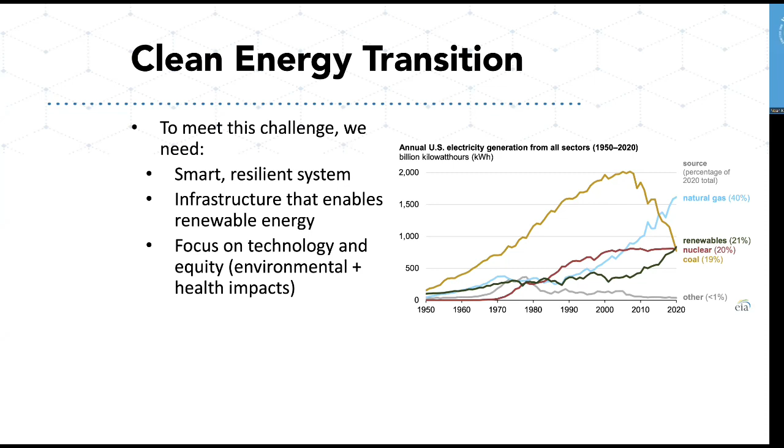So the three main things I want to talk to you about are: one, climate change is happening now, and so there's an urgent opportunity to address some of the most negative impacts of climate change by changing our energy utilization and switching out new sources of electricity generation and in transportation. We also know that energy is a major contributor to climate change, so therefore taking advantage of these technological innovations is going to be really important for our future. And I'm going to tell you about what we can do to reduce emissions and ways that we may be able to manage this transition in a better way.

So I wanted to start out just with a picture of the greenhouse gas emissions in 2018.

And this is a large and could potentially be a complicated diagram, but I really like it because what it shows is it links different sectors of our economy to carbon dioxide emissions, CO2, methane emissions, which is represented by CH4, nitrous oxide and fluorinated gases that all are greenhouse gas pollutants and contribute to temperature increases.

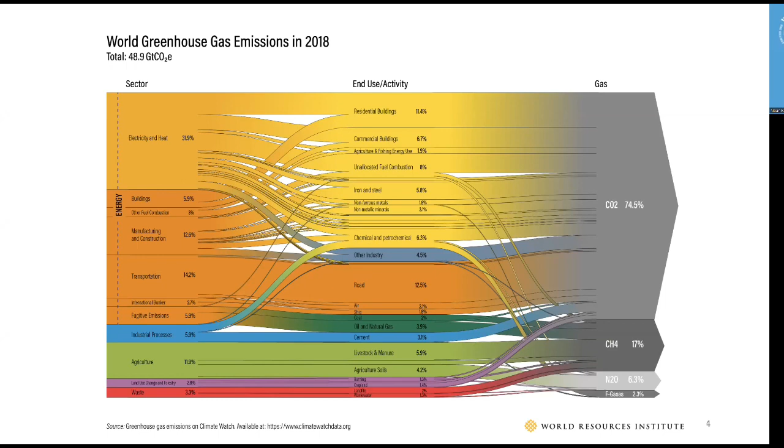And now there's a lot more focus, you may have heard in the news, about decarbonizing the transportation sector. And by decarbonizing, I mean going from a system that is mostly dominated by high carbon fossil fuel energy sources to one that has nearly zero carbon emissions. And that could be done by using electricity potentially in other sectors for transportation. But that's also a challenge that we have in terms of how do we reduce the CO2 emissions for large sectors like buildings, industrial processes, and agriculture.

I also want to give you a bit of a background in terms of the contribution of primary energy sources to the energy system in the US. So this is a snapshot of the US energy consumption in 2021. And it may look like a complicated series of flows and diagrams, but what I want to alert your attention to are a few things. So on the left side, we have the different primary energy sources, or essentially the key resources that provide energy that we can use in our economy.

Some of those sources are converted to electricity generation. So that's what we're using in our houses when we plug in our appliances and anything that uses electricity. We also need energy to power our cars and move around, and that's where a lot of our petroleum fuels are going toward creating gasoline that's used for transportation in the US. And additionally, we use energy in other ways, like for heating buildings and industrial purposes. And that is where natural gas is a very flexible fuel and contributes to many different sources.

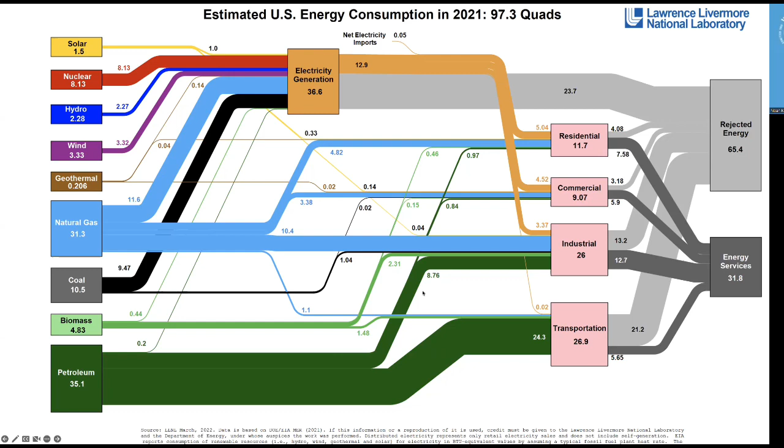So this is a snapshot of where the energy system was in 2021, but you might be curious, well, how does this relate to future decisions and climate change? And that's a lot of petroleum that's contributing to the transportation sector.

Well, we have a lot of work to do because in terms of the climate problem, there's somewhere around 600 gigatons of CO2 that we have left to emit before we experience 1.5 to 2 degrees centigrade warming on average, which has many effects of climate change. As you can see, the annual CO2 emissions are somewhere between 40 and 50 gigatons per year that globally we are emitting.

And part of the challenge, if you think of it from a budget perspective, is that because CO2 lasts a very long time in the atmosphere and has a very long residence time, the CO2 we put into the air today will last for almost the next century. And because of this, there's a pretty urgent need to dramatically reduce the annual amount of CO2 emissions that are being emitted each year.

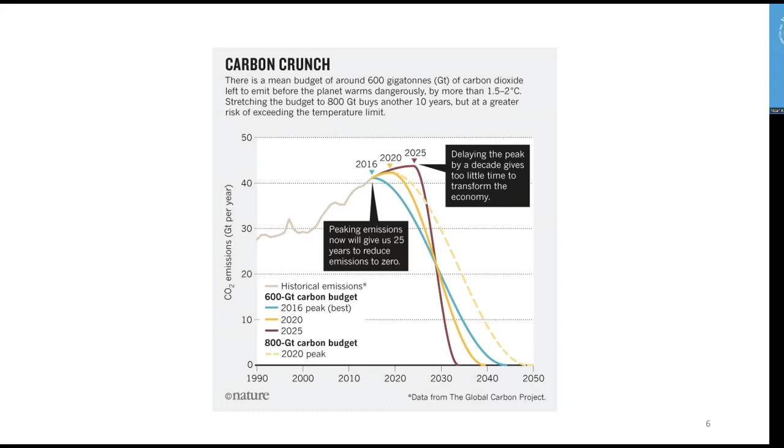Well, since we know energy is such a large contributor to these 40 to 50 gigatons per year of CO2 emissions, we can also look at the electricity sector as an opportunity to go from a very carbon-intensive electricity sector to one that uses much lower carbon electricity technologies. And I know this is a pretty dense chart, but what I want to highlight is the order of magnitude and difference of the CO2 emissions that are emitted per terawatt hour of electricity from sources like coal compared to natural gas and nuclear and wind and solar.

What you can see is that for every terawatt hour of coal electricity that's being generated, there's about 1,000 kilotons of CO2 emitted. And so this is a really large amount. Natural gas is a little bit less than half of that in terms of its CO2 equivalent. So if you think of it just from the perspective of switching from coal to natural gas, we're making some inroads in terms of the CO2 emissions per terawatt hour.

But when we look at other options that exist, like hydropower, nuclear electricity, wind, and solar, we see that there's only maybe between 2 to 10 kilotons of CO2 emitted per terawatt hour, and most of that is just embodied in the materials that are required to build the power plant in the first place. And so this is pretty striking because we know how to make electricity now in a cost-effective way on a large scale that competes with coal and natural gas.

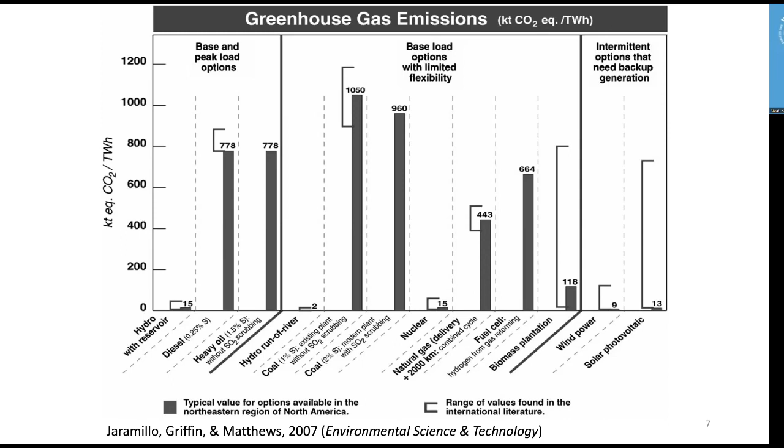But what's the holdup, you might ask? Well, coal and natural gas have some features that have allowed them to dominate the electricity space for a long time. They are very reliable and can provide electricity almost all the time. So one of the big technological challenges is getting renewable energy to compete with what's called baseload fossil fuel electricity, where you could have 24/7 reliable access to electricity from variable sources like wind and solar and hydropower. I just want to show you a picture of a natural gas combined cycle power plant because some of you may not have seen one before.

And the reason that I'm showing you this is that in the US, we've seen an increase over the past decade in the use of natural gas to produce electricity. Natural gas combined cycle power plants are more efficient than their counterparts that are just one combustion gas turbine, because they incorporate a gas turbine and then capture some of the waste heat and generate more electricity through an extra steam turbine. Some of the excess heat from the initial gas turbine is captured and used essentially to boil water to create steam, creating a secondary process which produces even more electricity. And these power plants are about 66% efficient.

But this is still a challenge in terms of the fact that we have between 300 and 500 grams of CO2 for every kilowatt hour that's being generated from natural gas. And there's also methane that's in the natural gas pipeline. So if we want to replace some of these electricity technologies with other options, there are a number of questions about, well, what can solar or wind or these other variable renewable energy technologies do?

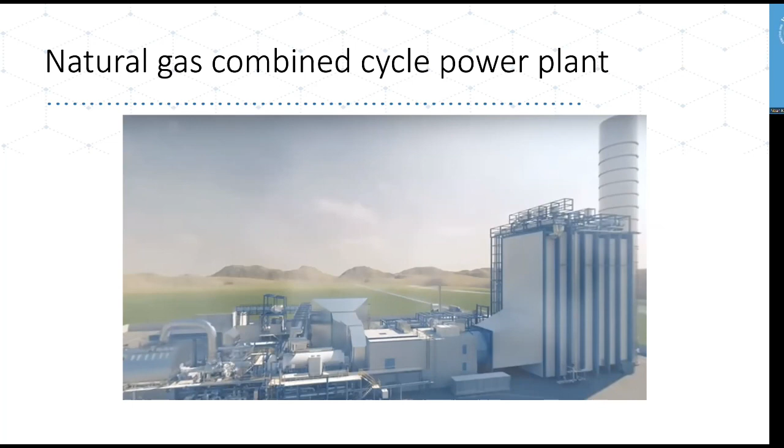Just from a standpoint of listing out some of the emerging alternative technologies to generate electricity, there are alternative options to a natural gas combustion turbine. That includes solar photovoltaics. So these are the solar panels that you may have seen on farms in North Carolina. We have the third most installed utility scale solar farms.

So these are mostly ground mounted systems, and many of them have been installed in places in eastern North Carolina that formerly were tobacco farms or other agricultural lands, and now they're being used to generate solar electricity. This technology also can be used on the roof of people's houses, so you could generate your own electricity. And we can come back to the merits of rooftop solar later on.

We also are experiencing, I would say, a renaissance in onshore and offshore wind turbine technology, because many of the wind turbine technologies that were being developed and installed 10 or 20 years ago were on the megawatt scale, which is millions of watts or joules per second that are being generated.

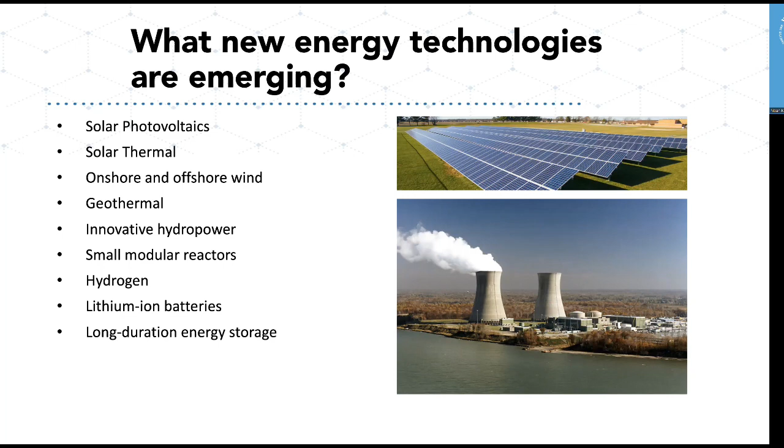So this is a major area where there's a lot of research being done in terms of what storage technologies exist, their potential in terms of their cost effectiveness, and also whether they are technologically ready to be deployed at a large scale for us to meet some of these challenges.

I also wanted to just highlight a few variations of some of these energy technologies that are potentially of interest. So in North Carolina, for instance, we have one of the largest floating solar installations in the United States, and floating solar is becoming a more popular form of solar PV generation globally. It's still a pretty small share of the total number of solar installations, but what's really interesting about floating solar is that for places where we don't have a lot of land available to just put a lot of solar panels, we could use existing reservoirs or some parts of water bodies to generate electricity. And in flood-prone areas, this may also be an interesting option.

So there's a lot of new innovations that are happening, not just in terms of transitioning from coal or gas to using solar and wind plus storage, but even within the type of solar PV technologies that are being developed, a lot of the innovations are around the racking systems and also the anchors and floats to be able to move around solar. And what's really interesting about solar as compared to some of these other electricity generation technologies I mentioned before is that solar is quite modular. And so, for instance, with a floating solar array, these systems could potentially be packed up and moved in the future if that was deemed to be necessary.

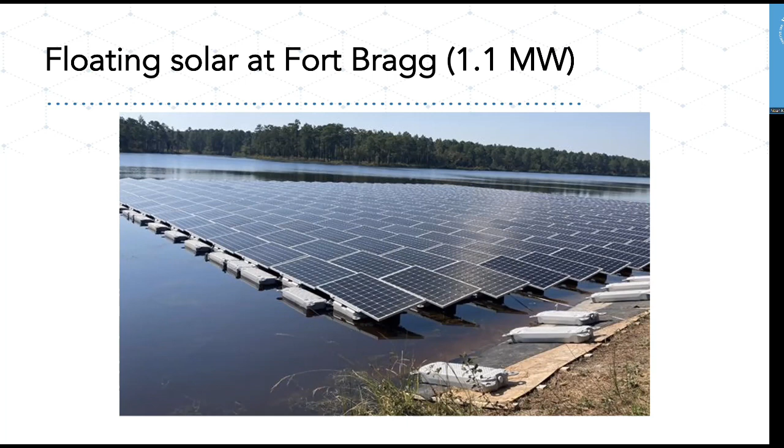And so while this is a pretty small project and would only provide electricity for several hundred homes potentially, there's an opportunity in the future to scale up much further.

I also mentioned that offshore wind turbines are undergoing a lot of innovation. Part of this is the actual structures themselves. Many of the offshore wind turbines that are being developed now that are several hundred megawatts or up to a gigawatt in scale are enormously tall. These turbines have been able to scale up in terms of their power capacity, but also have become more cost effective. And up until recently, there haven't been so many offshore wind projects being developed in the US, but now there's offshore wind being explored on the Pacific, in California, and also in North Carolina and Virginia. There's a few new offshore wind plants that are under development and installation now that provide a much more stable resource of wind power than some of the land-based counterparts.

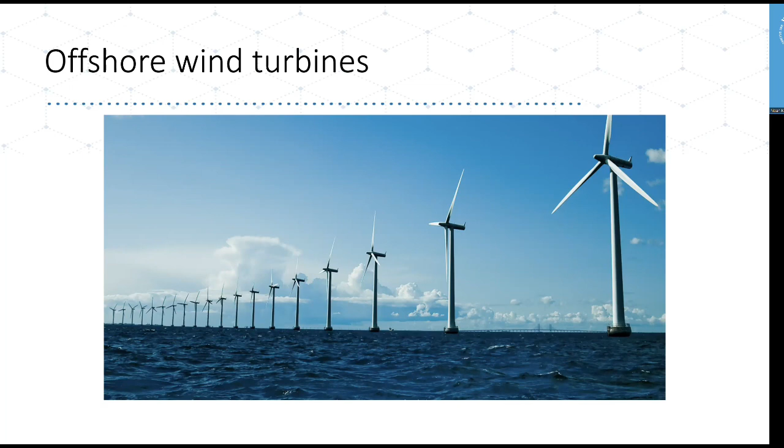One of the downsides with wind electricity is that unlike solar, you can't really just place it wherever you want; the wind turbines really benefit from being placed in places that have high wind speeds and reliable wind speeds. So part of the extra cost with wind is not just building the actual structures themselves, but investing in the extra transmission capacity to move the electricity from the coast to places where people live and are using that electricity onshore. So this is an area where there's innovation in the size of the generation technology, but it may require some further coordination and investment in transmission systems to be a real solution.

So I'm sorry that I'm showing you so many charts, but I think this one in particular tells a really interesting story. And it's called the duck chart because it looks like a duck. This is a chart that shows over the course of a day. So we can see from midnight to midnight how much electricity is being used by the grid in California. And this is a historical chart showing how much electricity was needed at every hour for a day in March in 2012, and then 2013, 2014, all the way through 2020.

And the reason it's called the duck chart is because it looks like a duck, and the belly of the duck is actually growing. And the reason it's growing, and this is a picture from California, is that there's a lot more solar electricity that's been installed on the grid. And that solar is taking away power that the utilities would otherwise provide during this period where there's daylight, so from 9 a.m. to about 6 p.m. This introduces some new challenges in terms of the way that the utility companies can provide reliable electricity for customers.

And that's why energy storage might be one of the key missing links to having a more reliable system. So for instance, if there's a lot of extra solar during the middle of the day, there could sometimes potentially be too much solar. And if we have some kind of battery technology or other storage device that could take advantage of this low cost and abundant solar electricity at 1 or 2 p.m. when the sun is strongest, then we could use that electricity later in the day, such as at nighttime when the solar goes away.

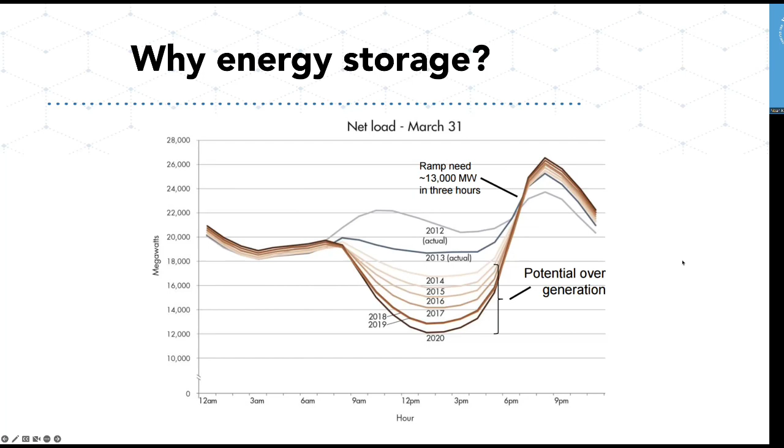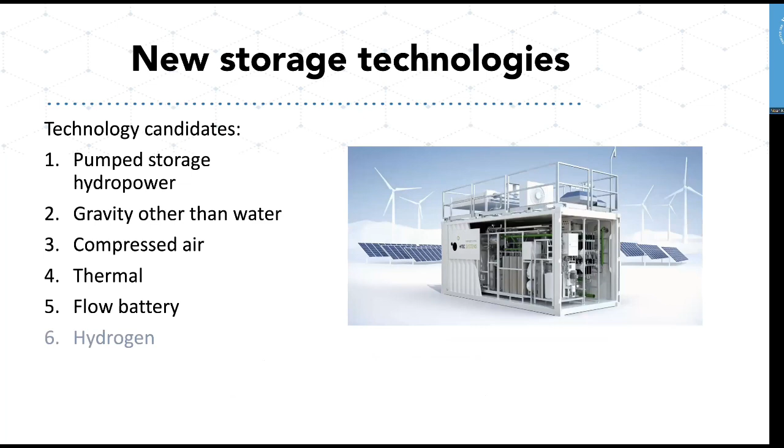So this is happening, and this is just to give you a sense of the scale. I definitely want to leave time for questions. So, I was asked to introduce a few different technologies.

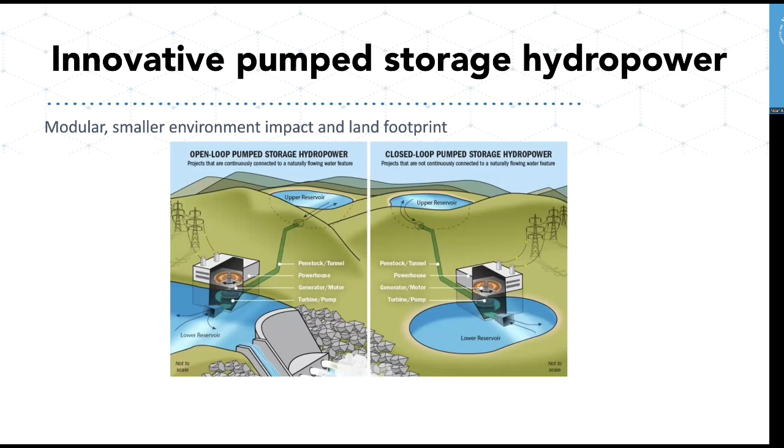There's also pumped storage hydropower that's emerging, and this is basically using gravity. The limitation of pumped storage hydropower for a long time has been that it's limited in where you could actually site it. But in the future, we may see closed loop systems that could be implemented in different places that have an elevation difference. And that's actually the largest battery that exists today, more so than lithium ion storage.

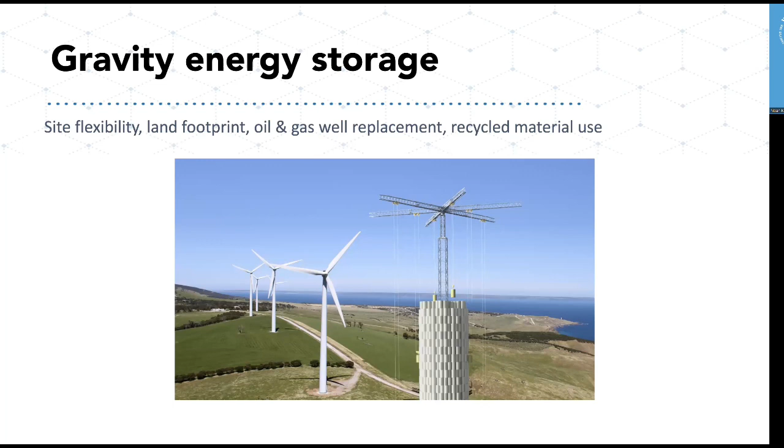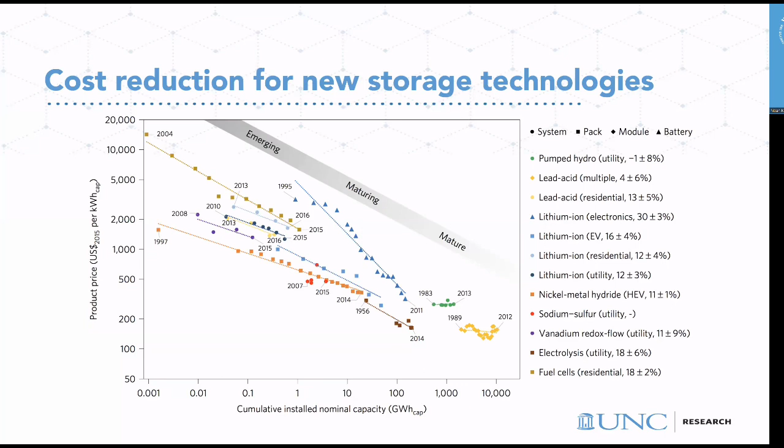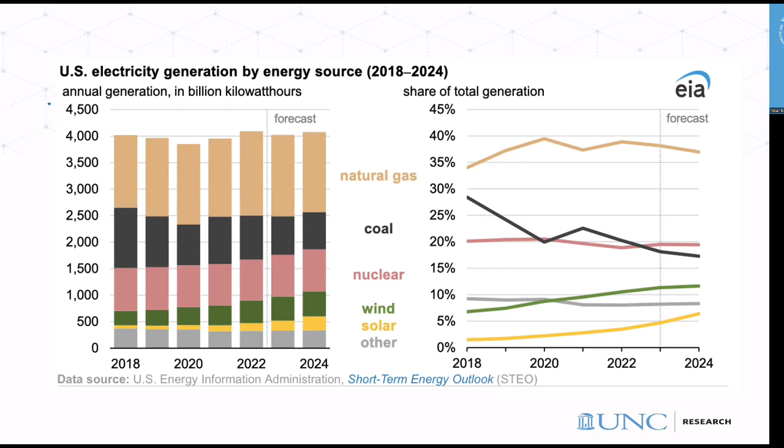Some other emerging technologies include gravity energy storage. So that could be actually lifting concrete blocks on a crane, and in a very organized and algorithmic way, you could release that energy. And this is a bit more in the weeds, but what I want to show you is that the cost of these storage technologies has decreased dramatically over the past 2 decades. And so because of that, we now have this opportunity to invest in storage and utilize it, but it may be a challenge in terms of the timing of what's necessary to get to a near zero carbon electricity sector based on where we are today, and integrate all these higher shares of wind and solar in the grid.

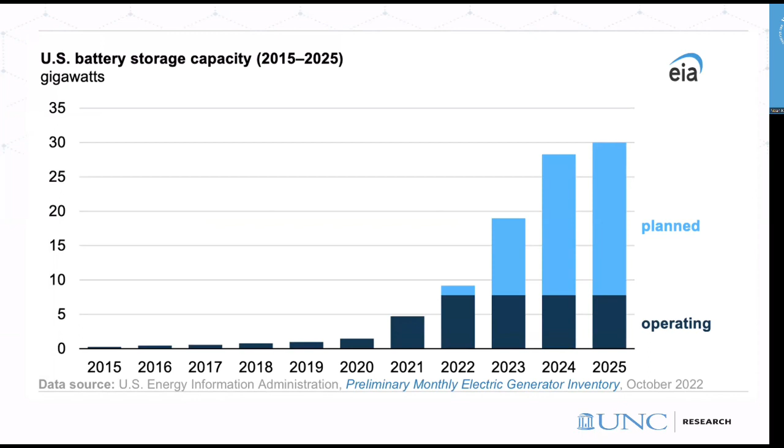And so I wanted to leave you with this chart. This is showing how much storage capacity has existed in the US grid from 2015 to 2025 in terms of the projected installations. And you can see that there was almost none in 2015 or 2016. And now there's over 7 gigawatts, and there's planned to be nearly 30 gigawatts by 2025. And so this could be really the missing link in terms of utilizing a lot more renewable electricity on the grid, and also being able to meet our climate change goals while transitioning our energy system from one that's fossil fuel based to one that uses a lot lower carbon sources.

So I think solar will play an important role in meeting these targets. The Inflation Reduction Act provides a lot of new economic opportunities and tax credits for different solar and wind systems that may contribute to this clean energy transition. But one of the limiting factors now is the amount of actual energy storage that's currently on the grid. And so it's not actually the amount of solar and wind that I would argue is necessarily needed to further decrease our CO2 emissions, but actually energy storage systems that would allow us to utilize the solar and wind that we already have built, because a lot of that is not necessarily getting utilized in the most efficient way.

And we have the technologies today to do this cost effectively, but the challenge, I think, is the will to change, and also incentives that the utility companies may have to continue their business as usual technology assessments.